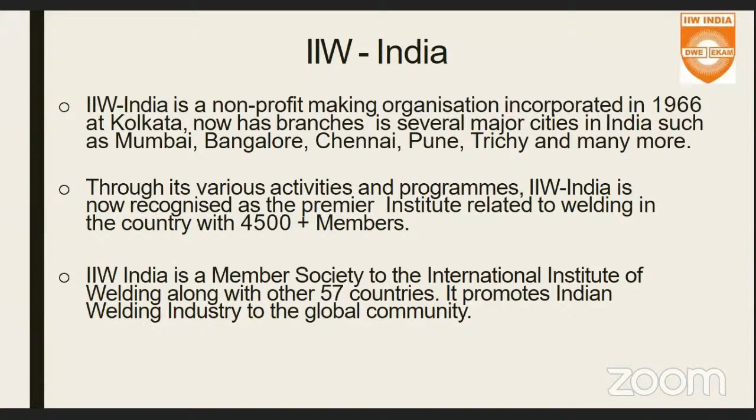We are now talking of the major objectives of the Indian Institute of Welding. It assists human resource development in welding in India. It works for technology diffusion in the industry.

There is some technical glitch. Yeah, now it is okay.

So IIW India also fosters R&D in welding in India. It also promotes health and safety related aspects in welding. It also has a major objective to establish international standards of quality for the Indian fabrication industry.

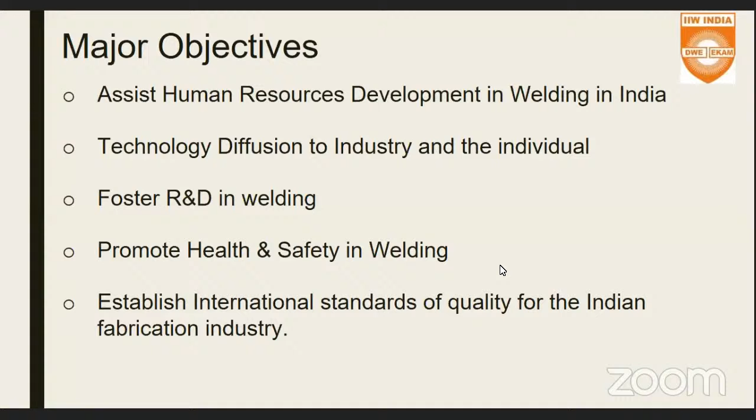What are the different activities that add value to welding professionals? IIW India conducts technical meetings, workshops, and industry-oriented training programs at the national as well as at the branch level. We also organize seminars, conferences, and exhibitions on welding and allied technologies. We have the Indian Welding Journal wherein a lot of technical articles get published quarterly in collaboration with AWS, that is American Welding Society, and a monthly newsletter is also being run, where you can see a lot of details on the website www.iiwindia.com.

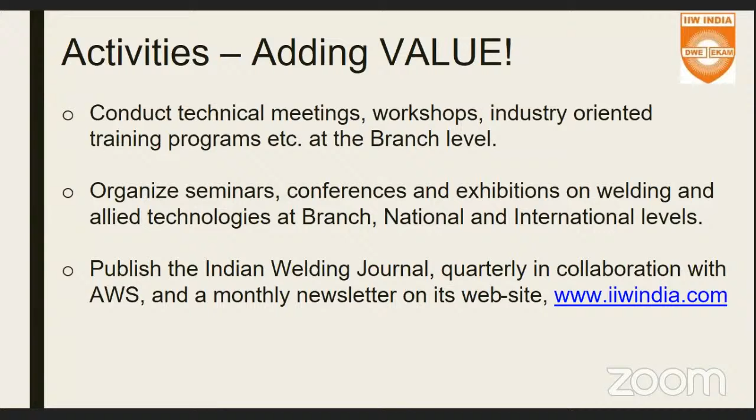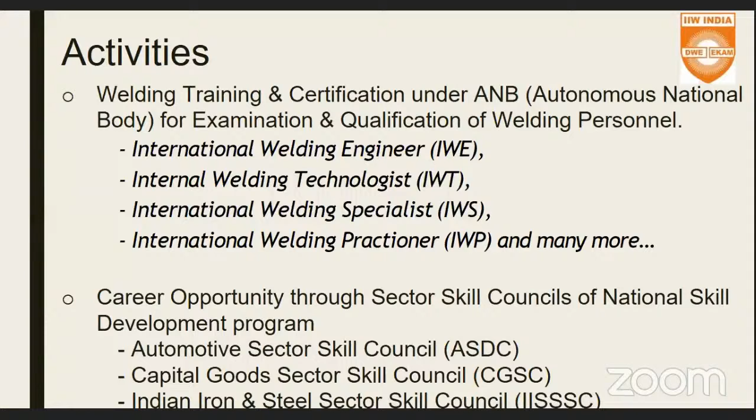Further activities, we also run welding training and certification like International Welding Engineer, International Welding Technologist, International Welding Specialist, and many more. We are catering to career opportunities by means of skill councils, with skill development programs like the Automotive Sector Skill Council, Capital Goods Sector Skill Council, Indian Iron and Steel Sector Skill Council, different skill councils that we are working with hand in hand for the skill development, particularly of welders. So these are a few more major activities.

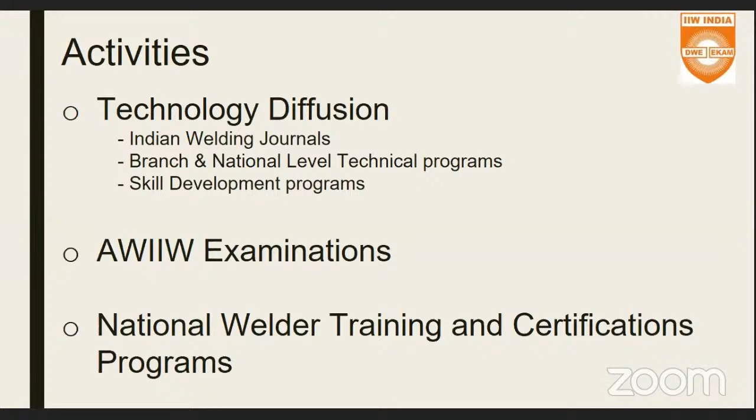When it comes to technology diffusion, as I've already mentioned, Indian Welding Journals, branch and national level technical programs, skill development programs, conducting AWIIW examinations, also conducting national level welder training and certification programs. We also help manufacturers with ISO 3834 audit requirements and conducting it. We also run train the trainers programs. Welder competitions, both male and female, we run, and many more other activities are being run by IIW India.

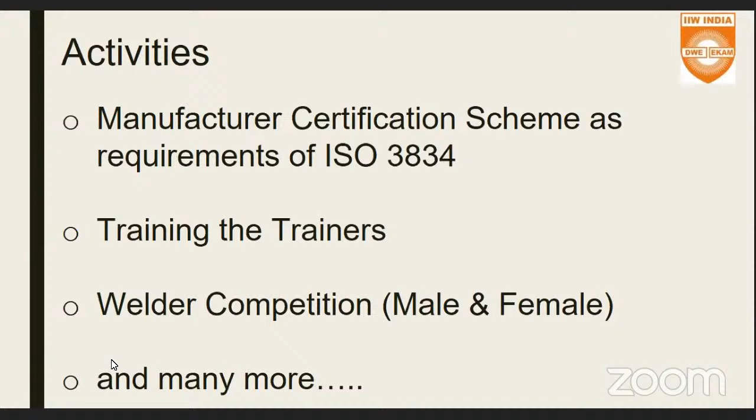These are the few benefits of being a member of IIW India. You can take advantage of several courses and examinations, and that will help you develop your personal career in welding, acquire and disseminate knowledge in welding, and do useful networking with fellow national and international experts, like what we are having today, an international expert speaker. So you are able to learn from them today by means of a webinar. Free access to the quarterly published Indian Welding Journal, concessional charges to members for the workshops or seminars, and many more benefits.

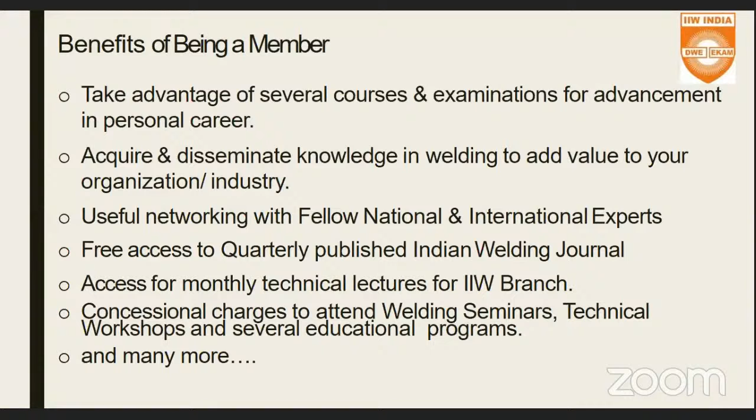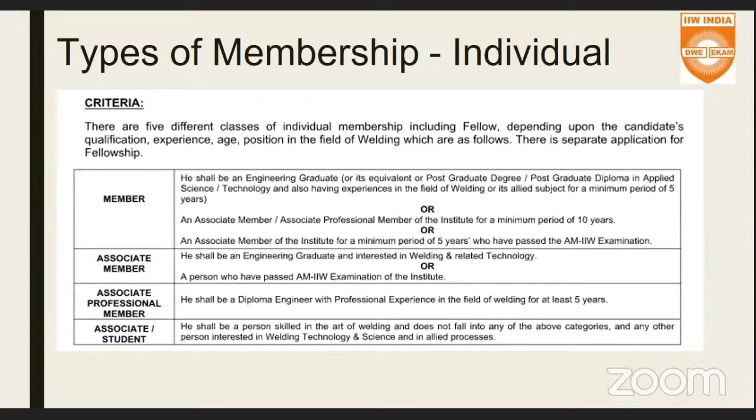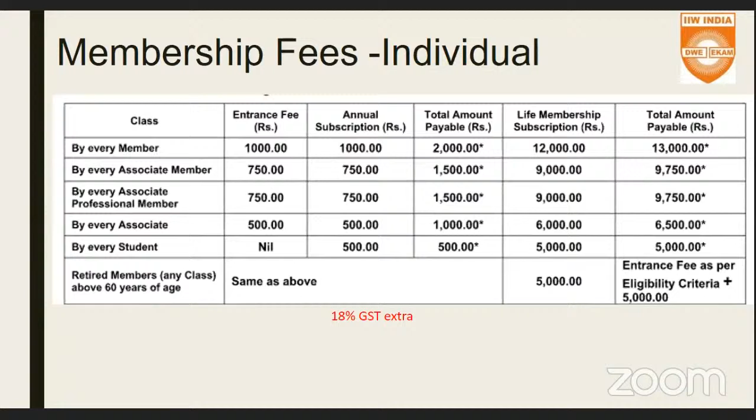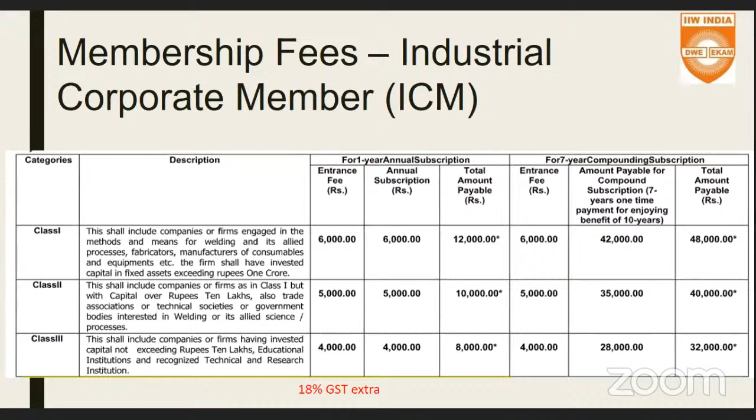If you as an organization would like to become a part of IIW, you can take the option of ICM, that is Industrial Corporate Member. These are the details on the slide you can see. And with that, I come to the end of this brief of IIW India and its activities.

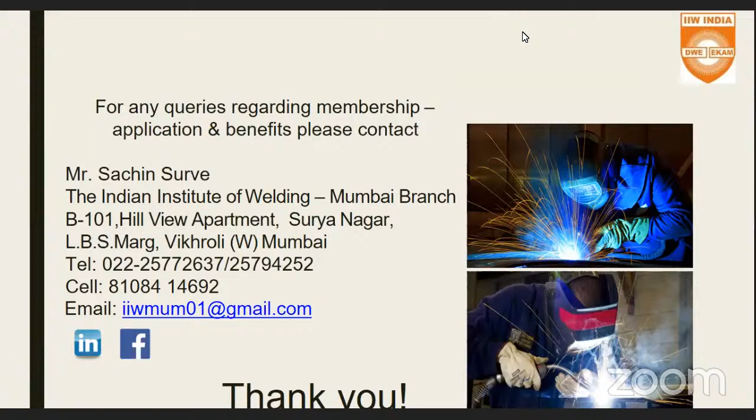Yeah, good morning, Chris Wiseman and Mr. James Redman. Good morning. Yeah, good morning. Morning. Yeah, a warm welcome from our side, from Indian Institute of Welding Mumbai branch for this tech talk.

Let me start a brief introduction regarding Chris Wiseman. Mr. Chris is a material scientist and has spent almost 30 years in an R&D career with a global aluminum producer. The technology areas to which he has contributed include corrosion, thermomechanical forming, novel test methods, plant process optimization, and joining and surface treatment, etc.

And Chris joined TWI in 2007 and is the corporate membership manager for both the aerospace and equipment, consumable and material sectors. He has an additional geographic responsibility for TWI industrial members in India and in supporting TWI's ambitions right down here. So most of you might have seen him at various conferences and seminars and exhibitions in India. He is a very frequent visitor. Today, his role is focused on developing technical and commercial opportunities for TWI and its customers all around the globe.

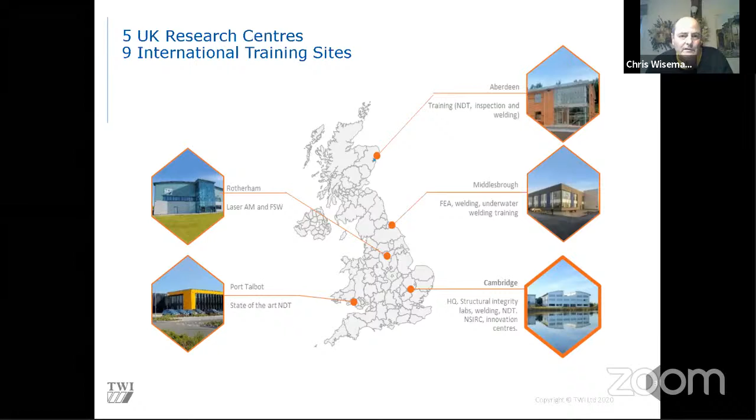This area down in Port Talbot in Wales is very specialized in NDT and in things like how do we apply NDT to Industry 4.0. So a lot of work going on there in, for example, continuous NDT. Next slide, please, James. And because most of our members are outside the UK, we have facilities, offices, and particularly training schools around the world. And in India, our main office and training school, as many of you may know, is in Chennai.

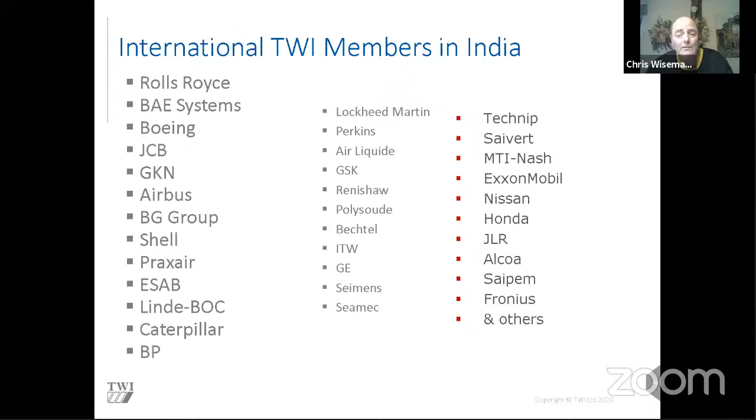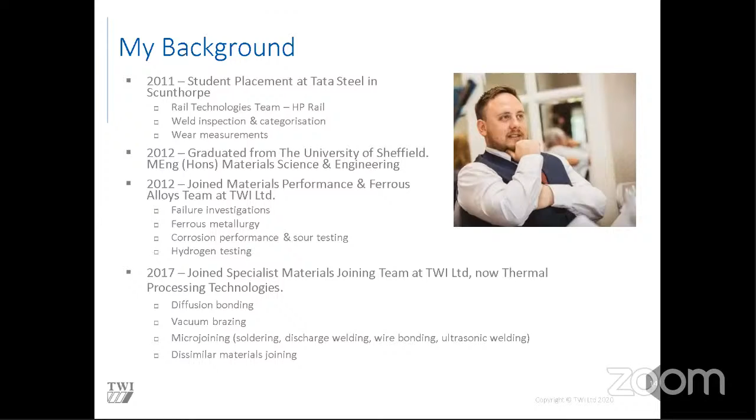I also do some other sort of more unusual things in the background. I do a lot of work with micro joining, so sort of electronics type joining projects, looking at soldering, discharge welding, wire bonding, and ultrasonic. And we also do a lot of work developing dissimilar materials joining, quite often with a heavy bent towards ceramic materials, trying to join ceramics to metals, for example. This is a brief overview of the thermal processing technologies team and the equipment and processes we cover.

So there's diffusion bonding, which I'll talk about more today. We do a lot of work with brazing, and probably 90% of our brazing work is vacuum brazing. And you can see on the top right hand side, I'll probably get the laser pointer, I can get that to work. There we go. So this is our large industrial scale vacuum brazing furnace, which is roughly about 1 meter cubed working zone. And we also have two smaller scale vacuum brazing furnaces, sort of laboratory scale.

We do infrequent work with flame brazing. We do have a brazing hearth and gas sources to do that. And we often get involved with induction brazing as well. Micro joining I've kind of already covered. The bottom right image over here is a wire bonding machine we have.

But we also do work with powders and coatings. We have a subsection of the team. There are 3 people working on powder categorisation. And by that, I mean looking at the shape distribution and size distribution of particles before they are 3D printed. And we also set up a nickel plating facility recently. We're doing lots of research into alternative and more novel type nickel plating processes. And finally, I've already covered ceramics. We cover our ceramic technologies at TWI. So joining questions, any sort of consultancy, be it failure investigations or processing questions.

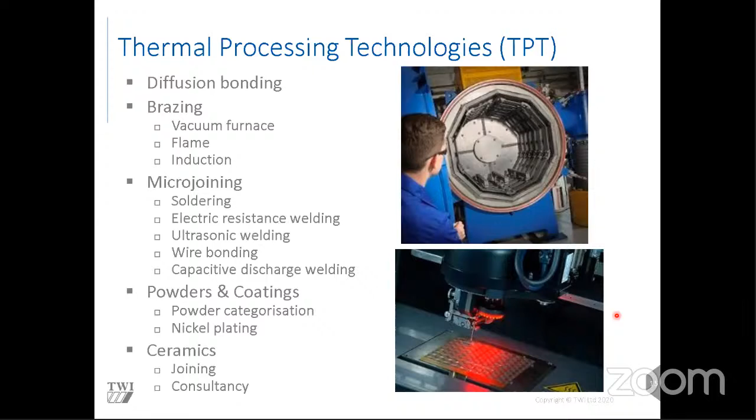So that's a brief introduction there, but now I'm going to go into what we actually all came here today for, which is to talk about diffusion bonding. So diffusion bonding is a joining process, and traditionally it's been used for more sort of niche applications.

And by that, I mean components which either have a complex geometry or where you're trying to join two materials which are difficult to join using more traditional methods. For example, when you weld certain materials together which are not compatible, you can form intermetallic particles which make the joint very brittle. So when you've got these issues, diffusion bonding could become a joining technology which is applicable.

But to put into basic layman's terms what diffusion bonding actually is, you take two pieces of material, typically with a machined face, you squash them together under load and under heat, and they become a solid block of material. Because we're heating these parts up, we typically do this in a protective atmosphere. So that could be a lack of atmosphere or a vacuum, or we could use an inert gas such as nitrogen or argon. And there also is some research being carried out looking at active gases. So a partial pressure of hydrogen could also yield some advantages.

But on the right-hand side, you can see a pictorial representation of what happens during diffusion bonding. So when you've got a surface, even if it looks really polished and flat, when you look at it closer up, it will have a rough surface. And these look a little bit like a mountain range, and these are called asperities. So the first thing that happens when you're applying the load and the heat is these asperities or micro asperities begin to deform. Then you start to get plastic deformation processes take over, creep type processes.

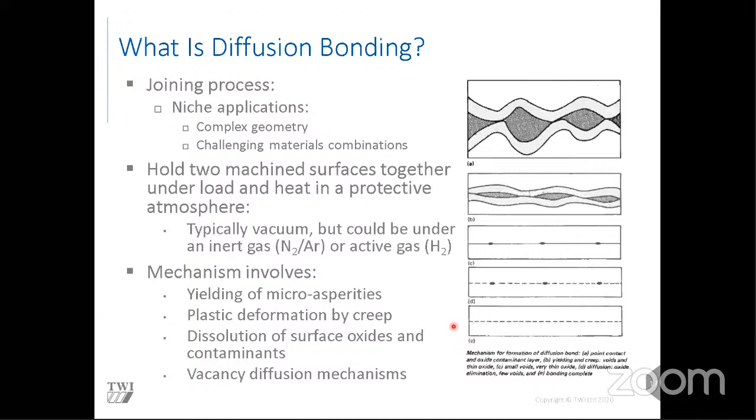Most materials will have an oxide layer on the outside, and at the temperature of diffusion bonding, these will then begin to diffuse into the parent material. Finally, at the end, once you have dissolved the surface oxides, the vacancy diffusion mechanisms begin to take over, and the small pores we've got get smaller and smaller until, if you've got the parameters correct, the diffusion bonded joint is almost impossible to resolve. So I'll give an example on the next slide.

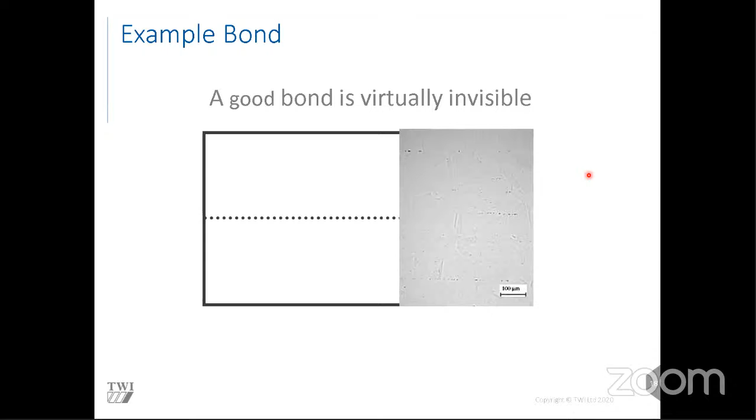So these were two different plates of material, and this is where the bond is. And as you can see in this micrograph, the bond is very difficult to resolve. You can just about make out a few tiny micro voids just here. So what I would also add, this property of diffusion bonding is what gives it such a wide range of potential applications, which I will discuss in later slides.

So just looking at the question there. Yeah, so this is a unique facility in the UK. I call this a medium scale diffusion bonding furnace. And by that, I mean, it's not an industrial sized piece of kit, but it's not laboratory sized either, which means we can get some pretty large parts into the furnace. The working zone is 300 millimeters by 360 by 400. We can go up to 1,600 degrees Celsius, and the hydraulic ram going through the center can apply up to 35 kilonewtons of load. This furnace 99% of the time is operated in a vacuum,

but we can put a backfill of an inert gas in there if we need to. There are certain situations, which I will discuss, where a partial pressure is beneficial. It's to do with something called vapor pressure of certain alloys. Certain materials will vaporize at high vacuum. So the hot zone is graphite lined, and we can actually modify the chamber for larger parts if we need to. I see there's a few questions. Let's quickly have a look at those.

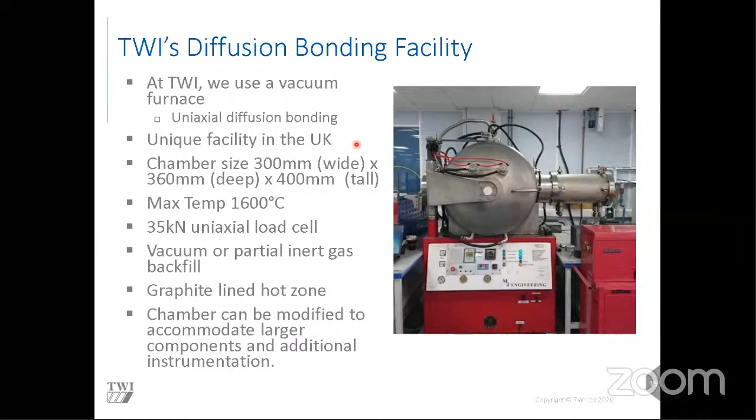So I think at this stage, I've given a bit of background on diffusion bonding, but I think it's a good idea to give an application at this point so you can visualize what you can actually do with this process. One of the things we mostly work on is the manufacture of heat exchangers, or I should say compact heat exchangers. On the top left here, we have what are called shims, and these have a pattern etched into the surface, often with a photochemical process. So it's called photochemically etched.

We stack these together, and when you diffusion bond it, you get a complex 3D structure, as you can see in the bottom left. These compact heat exchangers have advantages over traditional tube-to-tube sheet heat exchangers because the channels are closer. If you look on the bottom right here, this is a micrograph of this heat exchanger, and you can see how close the channels are. So this layer here will be the hot fluid, the layer below will be cold fluid, and vice versa. So you can see the small distance the heat has to transfer before it goes into the cold fluid. Because the channels are closer, they're more efficient, but because of the diffusion bonded joints, which I previously showed, which are almost invisible, the strength you can get from them can approach parent material. So you can actually run these at higher pressure as well to increase your efficiency.

Because of the way we can use diffusion bonding and these shims, I like to think this is an additive process, because you're adding several building blocks together to create a final part. And you can express yourself quite a lot in the design of these shims. So I think of it as an additive process. Not a traditional additive process, but a quasi additive process.

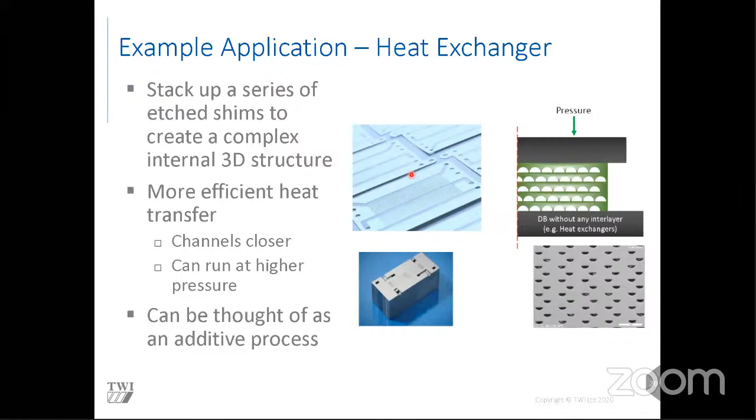With the process development trials, we start off with simple geometries, and we develop our parameters. Then we go to larger heat exchangers. So we go from smaller to larger, because with the smaller samples, you're trying to develop your parameters and work out the strength of your bonds. We typically investigate our bonds by mechanical testing, metallography and microscopy, and even corrosion testing. And then we finally scale this up to prototype full-size units.

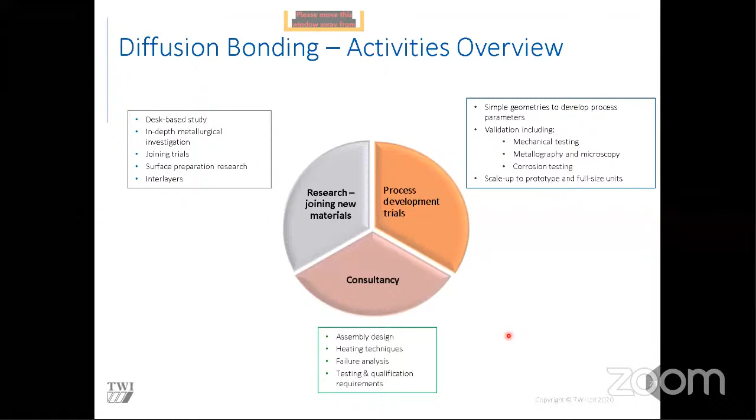Right, and the final thing we work on is consultancy. So we do general help with our clients designing assemblies. We look at different ways of heating the parts. That's quite important. And we also carry out failure analysis and testing and qualification programs for our customers.

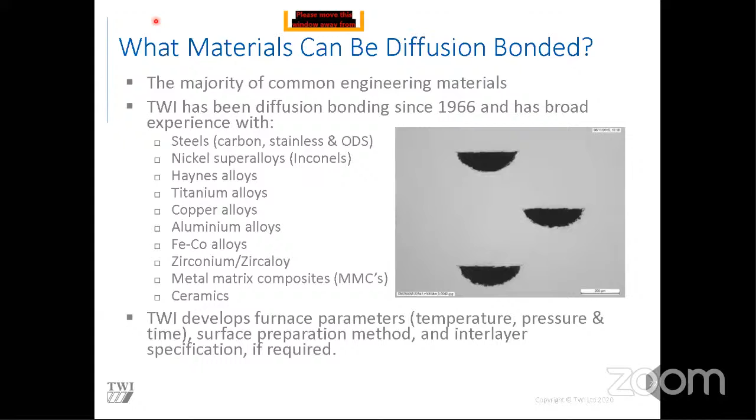So what materials can be diffusion bonded? Well, luckily for us, most common engineering materials can be diffusion bonded. And at TWI, we have looked at most materials. We've actually been diffusion bonding since 1966. We've looked at all different types of ferrous alloys, so carbon steels, stainless steels, ODS, nickel alloys, such as Inconels, the more exotic nickel-based and cobalt-based alloys, such as Haynes alloys, titanium alloys, copper alloys, aluminium, and also zircaloy and zirconium. And we've also investigated ceramic materials and metal matrix composites. What we generally do is develop the furnace parameters and the surface preparation requirements, which I'll go into more in the next slide.

And the reason for that is the limitation of our furnace. As I've already explained, we have a 35 kilonewton maximum load, so that often limits the pressure we can apply, especially if we have a large surface area component. But if you work in a laboratory, quite often you'll be working on smaller coupons, which allows you to apply a much higher load and increase the heating rates and the cooling times. But we tend to go for the lower load, longer hold time approach.

And to give you just a bit of a feel for some of the parameters, the temperature at which we bond is typically 60 to 80% of the melting point of the material. And by melting point, I mean the solidus. So some materials have a range of melting points. We'd go for the lowest one, so the solidus. The applied load is typically 1 to 10 megapascals.

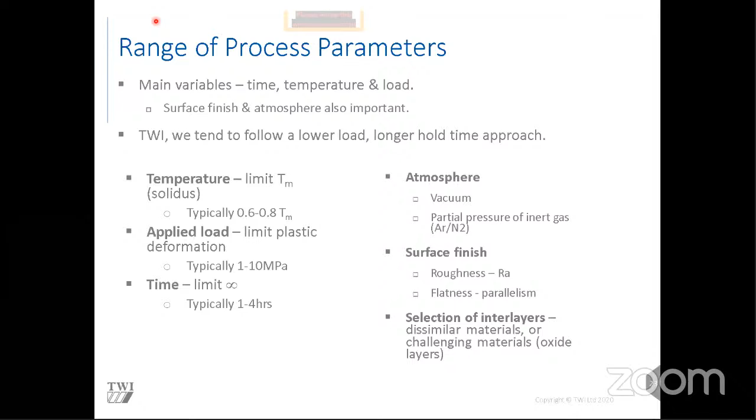So talking of oxide layers and interlayers, I'm going to spend one slide talking about a process called transient liquid phase diffusion bonding, or TLPDB. So this is slightly different to solid state diffusion bonding because we put in a thin interlayer of material between the two parts we're trying to join, and this will form a molten phase at a lower temperature than the parent materials. So essentially we're trying to melt the interlayer but not the parent material.

So it's kind of like brazing in a way, but you're applying a pressure and a load to the part, and you can get away with much thinner interlayers. What you can also do with certain material groups which are compatible, you can form a eutectic phase between the parent materials, and you can try to utilize this to get a small molten zone between the two materials. Off the top of my head, something like gold and tin forms a eutectic, or copper and aluminium. But anyway,

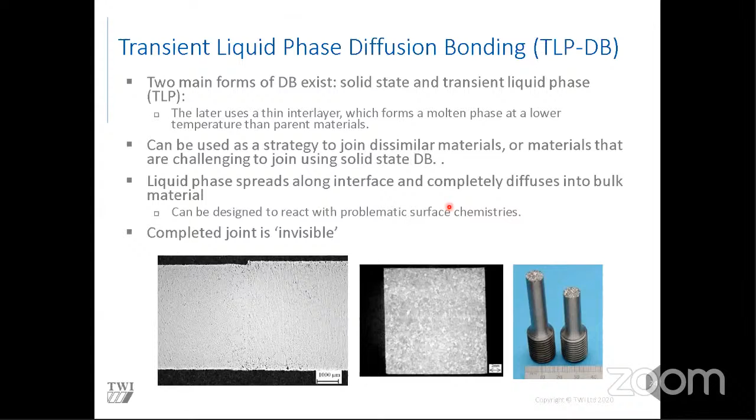Just quickly checking the questions that are coming in. So someone's asked, is friction stir welding a type of diffusion bonding process? I'd say no, it's not, because friction relies on a high yield, high strain approach, whereas diffusion bonding has no mechanical load of that sort, it's just a uniaxial load. And the reason for the load, it doesn't necessarily do anything, it's just to get the two interfaces into intimate contact. That's the whole reason for the load. The closer the materials are and the more you have in contact, the better the bond. So that's what the load does essentially. So they are different processes.

So yeah, because diffusion bonding is carried out at high temperatures, it can have an impact on the base material you're trying to join, and it also can have an impact on the design of your components. So we do a lot of work with our diffusion bonding development programs on verification and categorization, and these often feed back into the design process of the parts, and also provide us with confidence in the process, and allow us to determine if any post-processing is required.

For example, certain materials, once you heat them, become very soft, they become annealed. So you might want to do a post-diffusion bonding heat treatment. So some sort of heat followed by a quench, followed by an aging perhaps, for example.

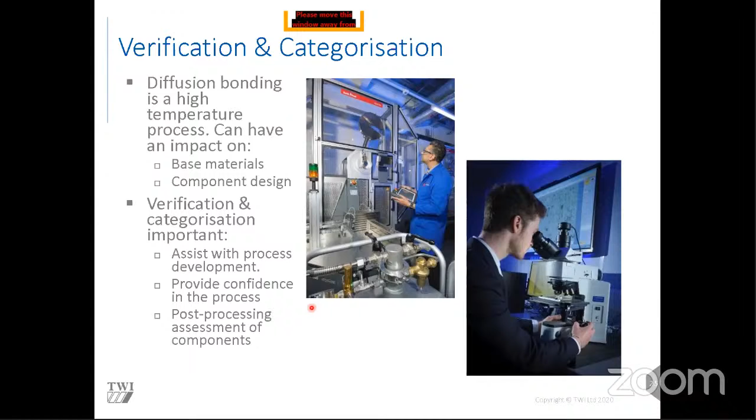So yeah, some of the verification techniques we use, the most basic yet the most powerful is sectioning and microscopy. From this, we can see the actual joints themselves. We can assess the level of porosity if there is any. We can see if there are any phases which are formed and analyze them using scanning electron microscopy, or the EDX function more specifically. But yeah, from metallography and microscopy, we can get an awful lot of information about our joints.

But the problem with that is it's not a mechanical test. So we do a load of different mechanical testing, ranging from tensile through to fatigue. If you look at Charpy impact, what I would say is we don't often do that on the bond itself, because trying to target the bond is almost impossible. But I'm talking more about Charpy testing of the parent material.

We also can do leak testing if the component geometry allows it. We can do a helium leak test to see if it's leak tight, and also pressure testing to see if it can withstand the service conditions. Finally, NDT is also an option, so ultrasonic inspection. But if you have a complex internal 3D structure, NDT can be very challenging.

So just looking at some more questions. Will diffusion bonding be useful to join single crystal alloys to polycrystal alloys without affecting single crystal properties? Yeah, it's something I'm wanting to look into. I'm not looking at single crystals as such. I'm looking at columnar crystals. But yeah,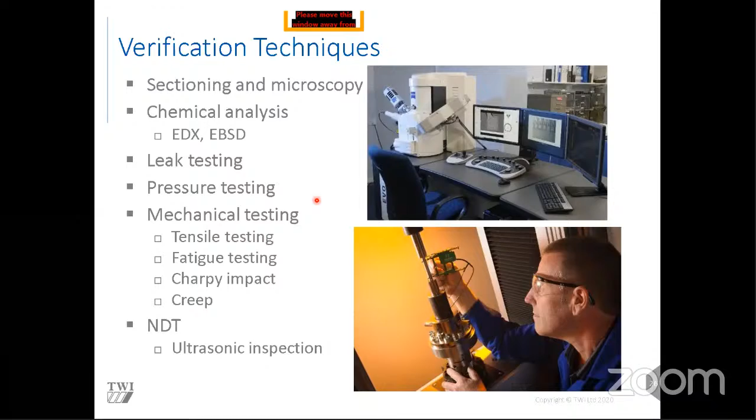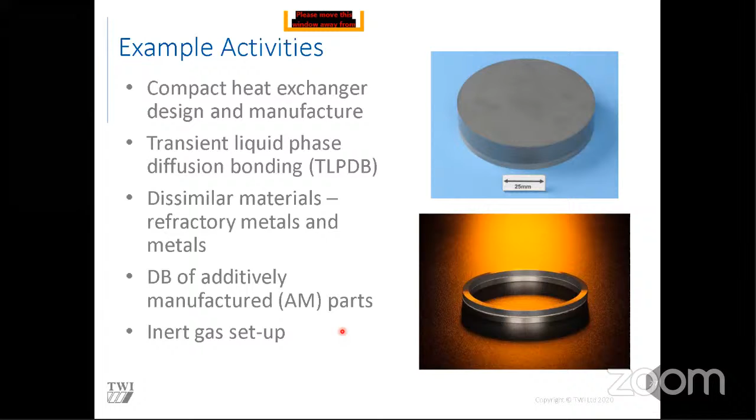Right, so that's sort of a brief introduction of diffusion bonding. I'm going to now go into more details of a particular type of diffusion bonding. This is for the diffusion bonding of aluminium alloys. So firstly, diffusion bonding of aluminium is challenging, but diffusion bonding for other materials is well established.

The reason it's difficult for aluminium is because of the oxide layer, but you're probably asking yourself, don't other materials also have oxide layers? And that is correct, but there's a difference here. Because aluminium alloys have a low melting point, you cannot heat the material to a high enough temperature to dissolve the oxide. In doing so, you would melt the aluminium, which is useless. So that's the problem we're trying to overcome. But there are more issues with that.

So because the actual temperatures for diffusion bonding aluminium, say, versus titanium, they're lower. So titanium diffusion bonds somewhere between 800 to 1,000 degrees Celsius, depends on the grade. Aluminium, you're about half that, well, sort of between 500 to 600, depending on your grade. So diffusion bonding is a diffusional process, and the biggest driver for diffusion is temperature. So if you're bonding at a lower temperature, you're getting less diffusion. So that's an issue. So then to promote diffusion between the parts, we actually increase the temperature to much closer to the melting point. So you're probably talking at 90% of the melting point rather than 60 to 80.

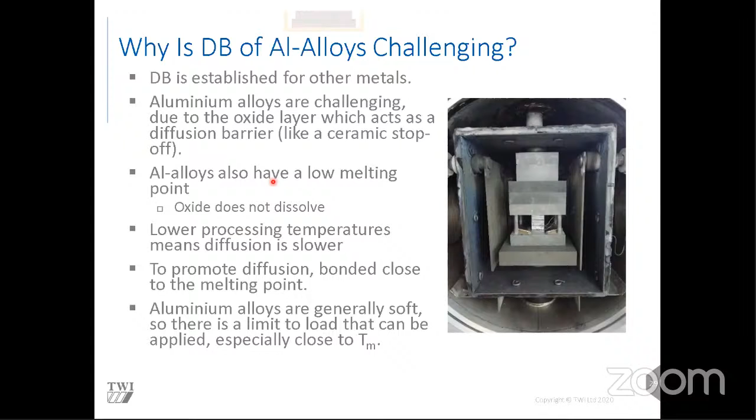So it all depends on your material, but ultimately we carry out small scale trials. So it's like an iterative process. You'll probably need between 5 and 10 samples to try to narrow down your processing parameters before you go to sort of larger scale. Right, so if diffusion bonding of aluminium is so difficult, why do we actually want to do it? So the reason is that there's a few distinct advantages that diffusion bonding of aluminium alloys have.

And the first one is it's an autogenous joining process. So that means there's no additional materials unless you have an interlayer, like I said. But if you don't have an interlayer, it leads to increased corrosion resistance. But also, aluminium alloys have a high strength to weight ratio. So that means you can have lighter structures. And that's very big news at the moment in Europe in particular, because we have some very strict emissions targets to hit by 2030. So anything which can help to lightweight your structures is considered very seriously.

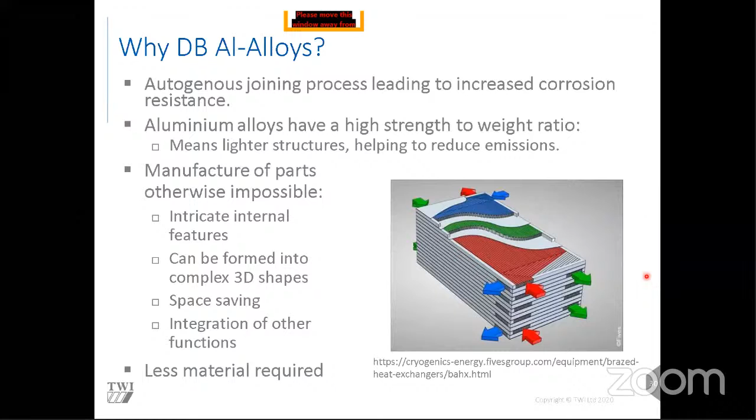But I think the main reason is diffusion bonding of aluminium enables you to manufacture parts which would otherwise be impossible. So you can have intricate internal features, you can form structures with complex internal 3D shape, you can create things which are more compact, so you're saving space, but you can also integrate other functions into your heat exchanger. And the other thing is, because you're making more compact parts, you're using less material. So there's quite a few benefits to aluminium diffusion bonding.

So is it actually possible? And the good news is, yes, it is. And there are 3 general approaches which I will briefly discuss. So the first one is to apply a large load, induce large deformation into the sample. This will disrupt the oxide layer and allow diffusion between the different layers. The issue with this is, if you have intricate features, such as in this image here, you have these tiny channels, if you apply a load which is too high, they will deform and turn into very thin crescent shapes, and they'll lose their functionality. So there's a limit to how far you can take this.

The second thing would be to use interlayers to form your low melting point phase. So typical materials which are compatible with aluminium include copper, zinc, and silver, but each of these have their own issues. So copper, you can form brittle intermetallic phases. Zinc is not vacuum compatible. What I mean by that is all materials have a property called a vapor pressure limit. So that means at a certain temperature, in a high vacuum, the material will just evaporate from the surface. It will become a gas. And zinc does that at very low temperatures and very low vacuums. So zinc is not compatible in a vacuum furnace unless you use a partial pressure of inert gas.

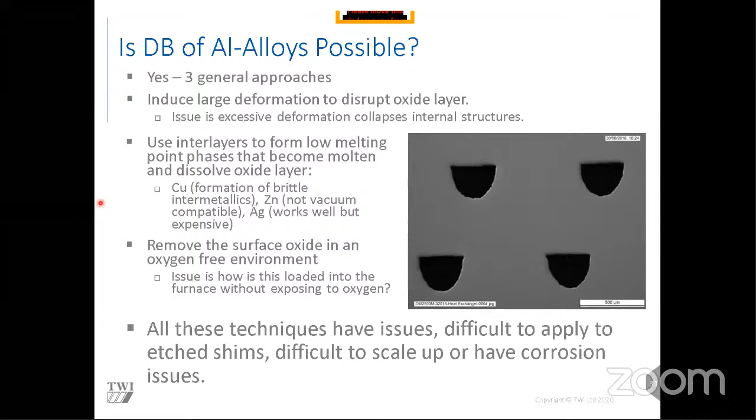So this is where TWI has developed some proprietary technology. We've actually developed a diffusion bonding technique where we can bond aluminium without the use of any interlayers and using a low applied pressure. We're actually creating a completely autogenous joint.

So we've got a couple of examples here. This is a block of shims that we've diffusion bonded together. And when you cut that in half and look at the section, you can see here the material is completely consolidated into one solid lump, and you can't see any of the bond lines.

We've done a lot of work for one of our clients in a single client project, so I can't talk too much about this, but what I can say is we have scaled this process up to full-scale heat exchangers. And in the images here, I should add, we're looking at 6082 grade, so 6000 series. At the bottom here, I can't discuss the precise process we use because this is TWI's intellectual property. But what I can talk about is we have an ongoing exploratory project where we're investigating 6082 and 2024 alloys.

I see there's a few more questions. I'll have a quick look at these.

Have you tried joining titanium and nickel alloys using DB? I haven't specifically. Titanium alloys are very easy to diffusion bond. They're one of the nicest materials. The biggest issue with them is they're very susceptible to any oxygen contamination, so you have to be very careful.

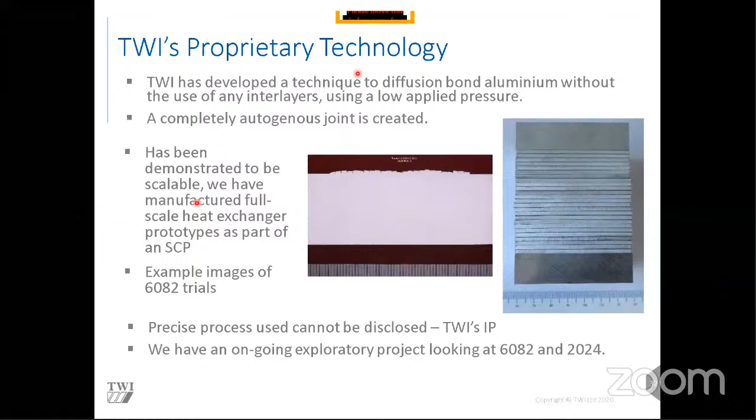Compared to other solid state welding processes, how much is the joint strength as far as the similar material? So for a lot of the diffusion bonded joints, the diffusion bonded joint can be the weakest part, but it's not always the case. Like the example I showed earlier, actually failed in the parent material. We like to get to around 90% of parent material strength or higher. So whilst they might be slightly lower strength, if you've done the process properly and removed all your voids, they're as good as the parent material. So they shouldn't create any sort of failure concerns specifically.

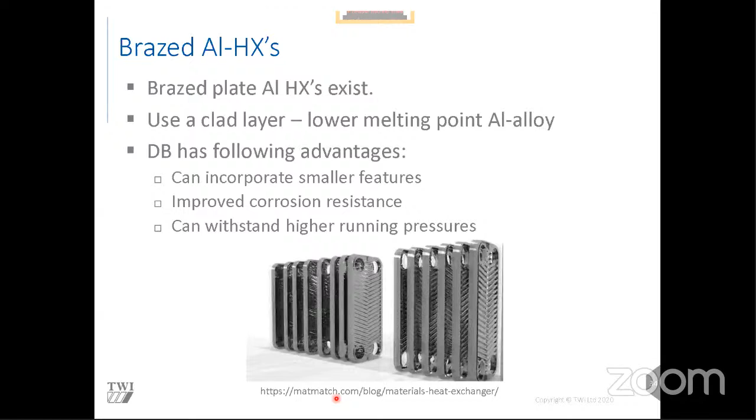Also, if we're doing a solid state diffusion bonded joint, we have improved corrosion resistance. And as I said earlier, you can get basically close to parent strength properties, so you can actually run the heat exchangers at higher pressure, meaning they're more efficient. Well, have a look at the questions again quickly.

Is the similar joint of Ti-Ni, so titanium to nickel, feasible through diffusion bonding? I'd have to have a look at that one. It's not one I've looked at. I'd have to look at the literature. I've not come across a combination of materials where it's not possible, though, with some clever thinking and some clever application of suitable interlayers. So I'd have to look into that one specifically.

What kind of surface preparation and finish is required for diffusion bonding? Very good question. So that ultimately is, again, as with most of these answers, dependent on the materials and the grades and the process you're using. If you're using a transient liquid phase process, you can get away with slightly rougher, slightly less parallel surfaces because you have the molten phase. But typically speaking, if you're doing a solid state generic diffusion bond, you want your surface roughness to be sub-micron. So I like to go for 0.4 micron Ra or better.

And with the flatness, again, you want it very, very flat. If you're aware of optical flat measurements, there's something called light bands, and we like to go for better than 4 or 5 light bands of flatness, generally speaking. So we're looking at very smooth, flat surfaces to give us the best chance of a good bond. But like I said, some materials are more ductile than others, so you can get away with a worse surface finish for certain materials.

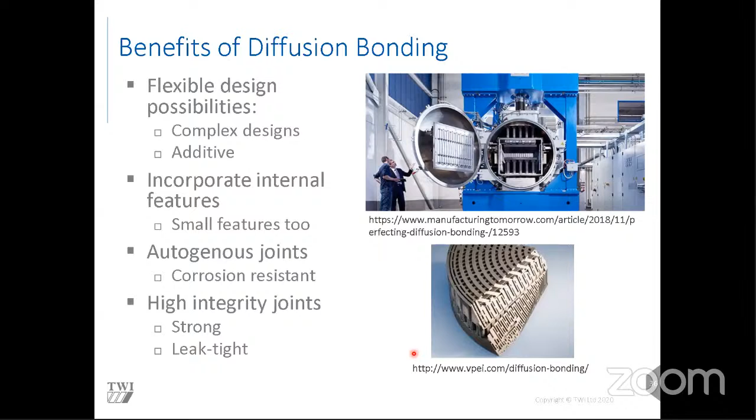Right, I'm now going to discuss some generic applications for diffusion bonding. So again, I just want to reiterate what the benefits are before I go into the applications. So diffusion bonding allows flexible design possibilities, so we can have complex designs and it's an additive process. And we can incorporate small internal features. So look at the bottom right, this is a very complex heat exchanger, which wouldn't be very easy to make using other processes. And the picture on the top right here is a more industrial scale diffusion bonding furnace. So yeah, again, the other benefits are we've got an autogenous joint, so it's more corrosion resistant, and we can have high integrity, leak tight, strong joints formed by diffusion bonding.

So one big area that we do a lot of work in is the use of compact heat exchangers in the aerospace industry. The aerospace industry has the requirements for lighter heat exchangers. And the next generation of jet engines, such as the turbofan engines being developed, also the ultrafan engines being developed by Rolls-Royce, are going to be running hotter.

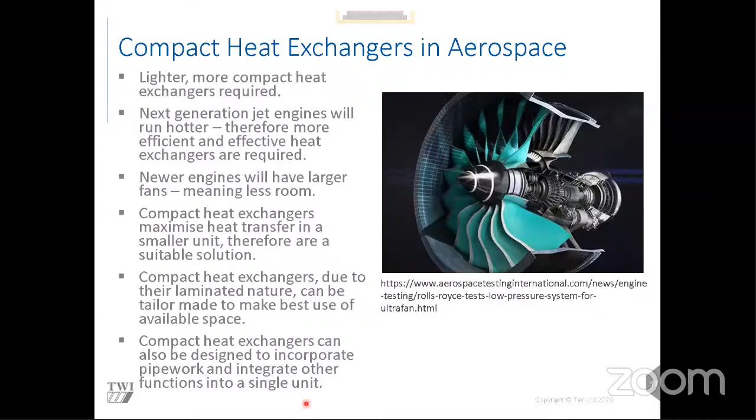The problem is a lot of the traditionally diffusion bonded alloys are relatively heavy, so development of aluminium is quite exciting for this application. But yeah, the compact heat exchangers, because of their laminated nature, can be tailor-made to make use of some quite unusual spaces and shapes and sizes of space inside the engine. They don't have to be rectangular; they can be any shape you like. The compact heat exchanger can actually incorporate pipe work and other functions into the actual unit itself. So it's a nice flexible technology which can be used in the aerospace industry.

A few more questions are coming, so I'm going to have a quick look at these.

Yeah, so I've got a question. How do we determine which interlayers to use for transient liquid phase diffusion bonding? Again, we start off by looking at papers and published articles, that'd be the first place to look, but then you also need to look at the phase diagrams of your materials as well. Just to try to work out if you're going to form any eutectic phases. But yeah, first thing really is literature, then it's small scale studies, and then examination.

Have you formed any brittle intermetallic phases? So we're looking at SEM, we're looking at hardness testing, all this sort of stuff. So you can have a best guess, but you ultimately have to test to determine.

Is diffusion bonding accepted by international codes and standards? This is something I'm not particularly familiar with. My manager does a lot of work in this area, and he is trying to push diffusion bonding more into these sort of design codes and actually standards. What I would say, diffusion bonding doesn't really have an actual standard anyway to manufacture parts, so I doubt it will be in ASME or DNV. So this is something being looked at by my manager at the moment.

Can reheating a diffusion bonding product lead to a disbond? Yes, it can. Certain materials, when you heat them and quench them, will deform quite a lot. So you do run the risk of debonding layers. Your material, the actual process you use, you can tailor it to induce less stress in your components. Big one is how you design your components in the first place. Try to remove corners and stress raisers. But the final one is to make sure you've got a decent diffusion bond. If there's no voids or nothing for a crack to initiate on, the chance of it ripping apart is lower. But it is a particular problem for aluminium alloys, that is. So that's a good question.

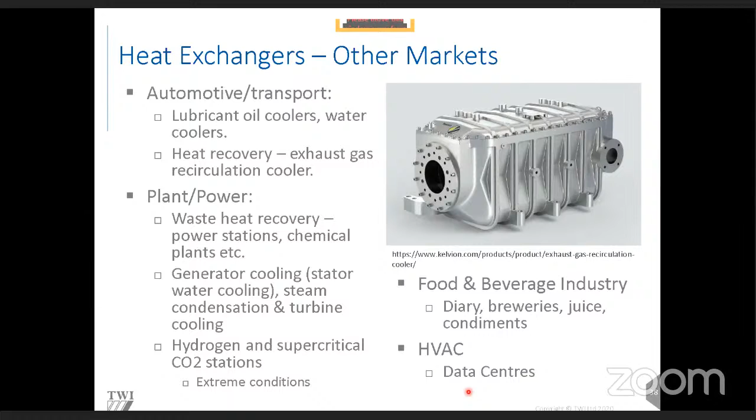And sort of more generic use could be the food and beverage industry. There's a lot of heating up and cooling down of fluids in these industries, so they need lots of heat exchangers. And the last one is, what's it called? Ventilation and air conditioning systems, such as data centers.

But common materials which are superplastically formed include titanium and titanium alloys, and also it is possible to do on aluminium alloys. One of the common things which links these materials together is a very fine-grained microstructure. So this is actually used quite a bit in the aerospace industry, and it's used to make hollow turbine blades, for example. But the way it works, you start off by diffusion bonding. So you have your different sheets, and you apply something called stop-off.

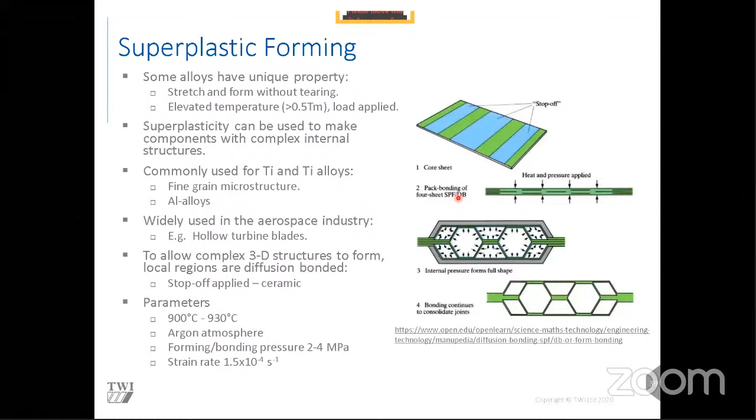So yeah, trying to think what else to say on this. It's quite often referred to as SPF DB, so superplastic forming diffusion bonding. So that's a sort of niche application of diffusion bonding to be aware of.

Got another one here. Let's see if I've got any more questions first. Will diffusion bonding withstand its working environment if it's at a lower temperature? I think what you're saying is, are diffusion bonds better at lower temperatures? I think the answer to that is yes. I think it all depends on the materials you've selected, which grade you're looking at, because it all depends on the joints and your actual environment.

So I'm going to go on to another very unique type, a sub branch of the diffusion bonding family, and that's something called electrostatic bonding. This has been used since the 1960s for joining silicon to glass. And this is very similar to other diffusion bonding processes because you require the surfaces to be very clean, very flat.

The components here, so this is our electrostatic diffusion bonding kit at TWI. These plates move together, and your part in the middle is what's diffusion bonded. Once these plates come together, a big shell comes down over the top, and that's your vacuum vessel. These are typically bonded at 3 MPa and about 400 degrees Celsius. Once you're at your top temperature, you apply a DC voltage of around 100 volts to the parts, with your metallic components being held positive. So you need the electric current for this to work.

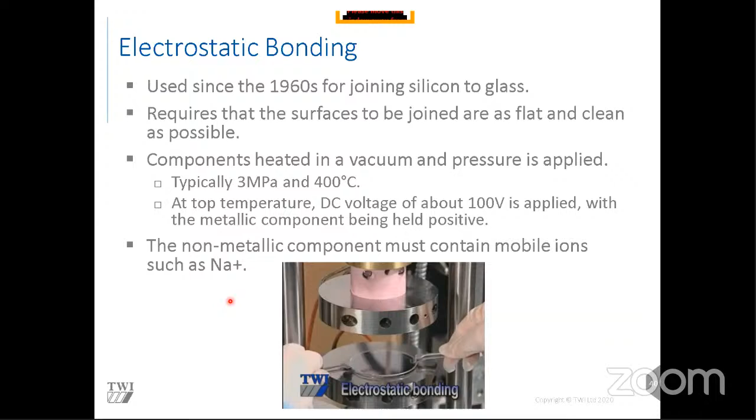The other thing you need for electrostatic bonding to work is mobile ions, such as sodium, in the glass. Other than that, I don't actually know too much about this. Our electrostatic bonding kit hasn't been used for around 6 years, so I've never looked at this myself, but it is another alternative diffusion bonding process I thought you would be interested in. But I couldn't answer too many questions on that, unfortunately.

So another sub-branch is hot isostatic pressing, known as hipping for short. The fundamentals of this are very similar to uniaxial diffusion bonding, where you're heating up materials and applying a load to them. But what is different is how you apply the load. Rather than a hydraulic ram, you're using a pressurized gas to apply your load, and that's commonly argon. This creates an isostatic load on your parts. That means it's getting squashed from every single direction rather than just one direction.

And the pressures that are used are typically really high. You can get up to 1,000 or 2,000 bar, which is why you see in the image, this is an example of a HIP furnace. You've got your furnace here, and you have a massive yoke around the outside just to keep the pressure inside the vessel. All of that is just strength and reinforcement. So you can get some ridiculously high pressures. You can use hipping to join solid parts together, but we quite often look at using hipping to consolidate and join together powdered material.

Common applications for hipping include hard facing. You can put a wear-resistant or corrosion-resistant material onto steel, for example. This is quite often used in the paper mill industry and the plastic extrusion industries. You can also use it to densify additively manufactured parts. You can take components you 3D printed using laser additive manufacture, for example, put them into your HIP, and it will then remove all porosity from your parts.

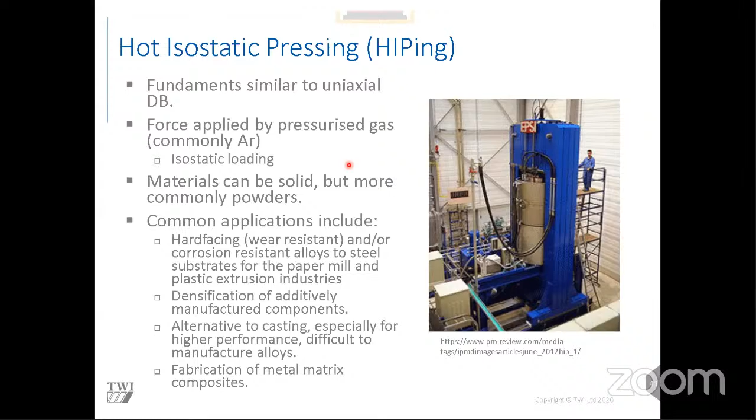So yeah, some other generic applications. One is a cryogenic heat exchanger. On the right-hand side is an example of a cryogenic heat exchanger. This is not diffusion bonded. This is a traditional tube type one. But imagine if you could make this complex structure into a compact heat exchanger. I think aluminium alloys will be very good for this because of the crystal structure of aluminium, they do not become brittle at lower temperatures, and actually, in some cases, become ever so slightly stronger.

So I see a really good opportunity to use aluminium alloy diffusion bonded heat exchangers where liquid hydrogen, nitrogen, helium, or oxygen is used. Could also be used for superconductor type applications or in the liquefied natural gas industry. So they're the two sectors I'm looking at. Other applications include process intensification, particularly for the petrochemical industry. What I mean by this is a lot of these petrochemical processes have a lot of waste heat and waste gases, so it's trying to use that and bring it back into the system to increase efficiency. Instead of just losing your heat, let's use it to do something else, to save money, make it more efficient, that kind of thing.

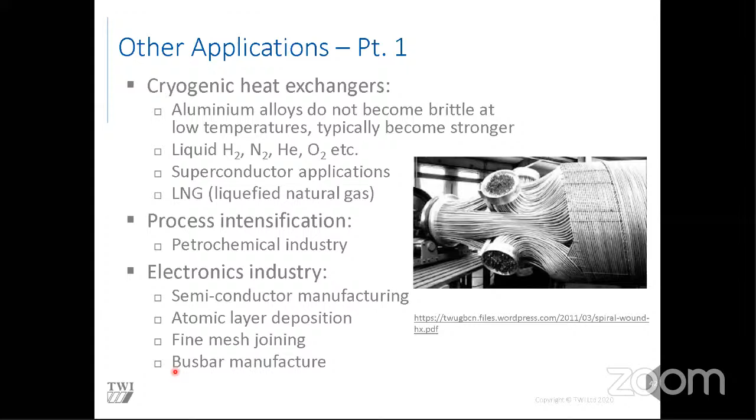Another area where we've done quite a few projects recently is the electronics industry. A lot of machines and equipment which are used to manufacture semiconductors make use of some very complex structures, kind of like shower heads, but much more complex, with lots of very small holes, and they can be vacuum brazed or diffusion bonded together. Same for machines which carry out atomic layer deposition. They need very precisely sized and shaped nozzles, so maybe diffusion bonding can be used for that. We've used it recently to join fine meshes together, and we've also looked at busbar manufacturing. The real driver there is trying to join dissimilar materials to create transition pieces, the busbars.

Other applications include microsystem technology. What I mean by this is there's a whole new area of 3D printing and additive manufacturing, but control and quantification and sizing of the particles is very important. And what you could do is use diffusion bonding to make fine channel filters for your powders. So you could say any particle over 0.5 microns cannot get through the sieve, so you filter out your larger particles.

So particle sieves and fine channel filters. Another area is injection molding dies. On the right-hand side, we've got two approaches. On the left is traditional. So you've got some pipes in your die. On the right-hand side, you've got your additively manufactured part, or your diffusion bonded part.

And as you can see between the two, the channels here are much closer to the surface of the die. This is called conformal cooling. It's trying to get your heat transfer as efficient as possible. And this is very, very big news in the injection molding industry because tool wear is an important consideration. As you can see, the tool here is much hotter compared to the conformally cooled version, but also the quality of the parts which are injection molded is much higher quality if you can get the tool to be colder. So you're increasing the life of your die, and you're improving the quality of your injection molded parts.

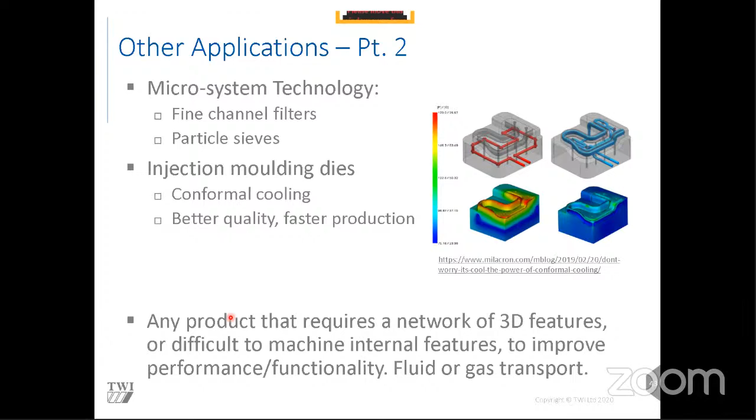And nowadays, I don't know if you guys have ever seen this, there's some very, very intricate stuff being injection molded. There's some very tiny, very fine features. They're really pushing the boundaries. Conformal cooling helps to enable this. But just to summarize, any product where you have a complex network of 3D features or difficult to machine internal features, where you're trying to improve performance or functionality, you can use diffusion bonding. Anywhere you've got a fluid or a gas you're trying to transport, you can use diffusion bonding. So I'll go back to the questions again.

So what is the difference between diffusion bonding and roll bonding? Roll bonding is very similar, because you're heating material and you're applying the load and you're rolling it. The main difference is the time. Diffusion bonding is generally speaking a process which has a longer hold time. And with roll bonding, you're trying to create things like braze alloys with an interlayer or sandwich structures you're going to use somewhere else. You're trying to create something thin. Diffusion bonding is looking more at 3D structures, but you could consider roll bonding as a subset of diffusion bonding. So that's certainly true.

Can diffusion bonding be used to join tubes to tube sheets in shell and tube heat exchangers? Uniaxial diffusion bonding, no, but there's no reason you couldn't look at using hipping. The issue is going to be what size is your shell and tube heat exchanger. If it doesn't fit inside the HIP furnace, then you've got no chance. But I think generally with diffusion bonding, we're trying to get away from tube to tube sheet heat exchangers. We're trying to replace those with compact heat exchangers. So that's kind of the drive of the technology.

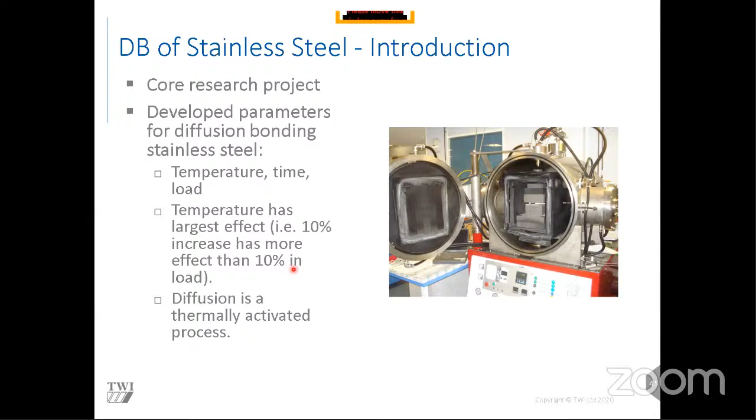What I mean by this is a 10% increase in temperature has a larger effect than a 10% increase in load or pressure. So temperature is very important. And here are some micrographs of what we managed to diffusion bond.

And you can actually see the size of the pores aren't too dissimilar from the size of the sort of intermetallics or pores in the parent material anyway. So it's very difficult to see.

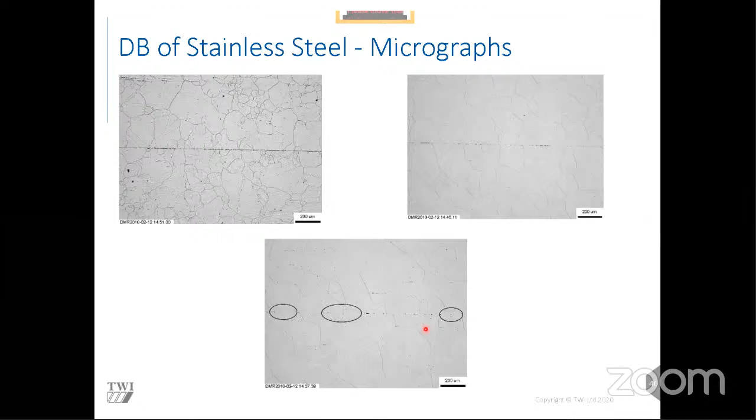Before I go on to the next bit, I'll look at a couple more questions. Can diffusion bonding be used to fuse porosity and or blowholes in products, for example castings? I've not seen uniaxial bonding used in this way, but if you consider hipping to be a diffusion bonding process, then yes, you can use hipping potentially to consolidate castings. Again, I've seen it mainly with 3D printed parts. I've not explored generically cast parts, and I don't get involved too much in the hipping powder side of things, but we do have experts in the team who could discuss that further if you're interested.

Can we diffusion bond between different metals? Yes, we can. So if we're lucky, we can diffusion bond different materials using no interlayers, so a solid bond. But the number of alloys where they're compatible is few and far between. There are a few though, but quite often you need to use an interlayer to create a transient liquid phase diffusion bond, or you could try to make use of a eutectic phase if it exists for those different materials. So it all depends on your combination of what approach we would take.

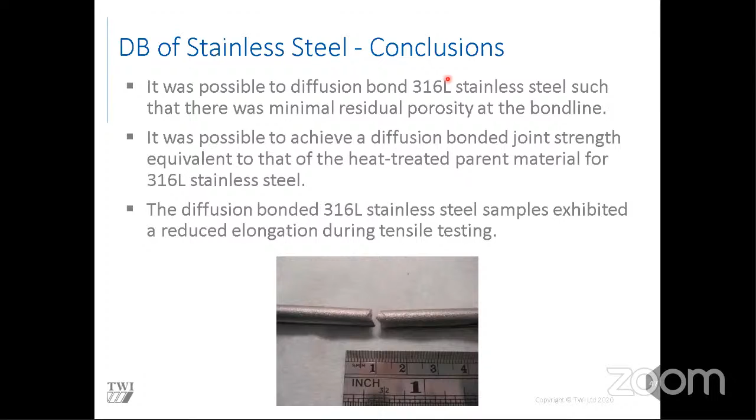Right, so I'm going to go through another case study now. This is a European collaborative project we carried out called Renew X. This is supposed to resemble an X, these two arrows. So yeah, brief overview. There are 200 million households in Europe. All of these have domestic heating needs, and it actually accounts for around 30% of the whole of Europe's energy demand. So we need to try and reduce this to achieve the emission reduction targets set for 2020. So we should add, this project was carried out around a decade ago. So that's why it's saying 2020 targets.

And the other thing as well, from a security point of view, Europe wants to try to decrease reliance on imported energy from places like Russia, for example. So one solution is to use more renewable energy. And we're looking at, instead of a conventional boiler type system for a house, something more efficient called a heat pump.

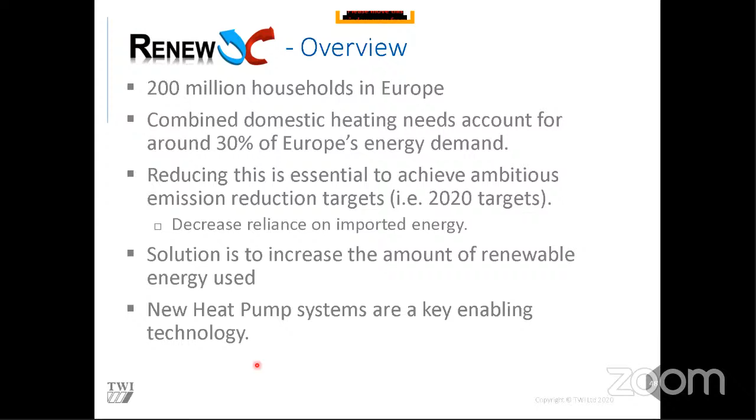And these are sort of new, well, as of a decade ago, newer systems to heat your home. So the challenges were several of these. Electrical heat pumps are expensive compared to your modern condensing boilers. The assumption was when this project began, there's going to be no subsidies for these units. So heat pumps, for them to be economically viable, have to significantly outperform a traditional boiler or a gas-based alternative, so a gas boiler. If it's more expensive, it's got to be better for people to buy it.

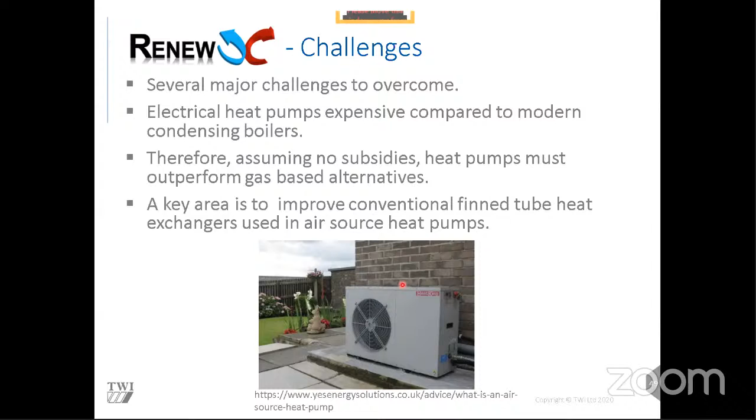Essentially, in the initial phase of the project, it soon became very apparent that a good way to replace the traditional heat exchangers is to use a compact heat exchanger. And the literature reviews and discussions amongst the consortium eventually decided on a 316 stainless steel heat exchanger. So this was really good for us because we carried out that research program, which we've already discussed. So we already had the data.

But basically, the way these parts work is you have your photochemically etched shims, which you stack together to create your complex geometry. And these can then operate at high pressure and are leak tight. So the advantages of these heat exchangers over the conventional finned tube heat exchangers are they're smaller, lighter, they're a single block of material, there's no potential for galvanic corrosion, and they are corrosion resistant because of that. So those are the advantages.

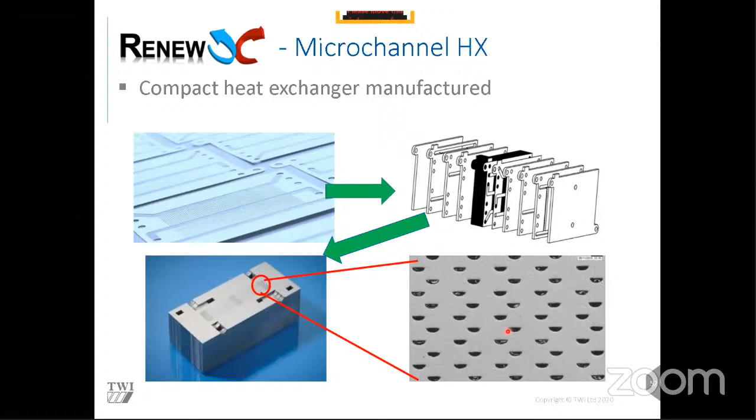The design of the shims themselves is important. In fact, I've not really discussed this yet. If I go back a slide, when we're applying the load, it has to go through each individual layer. And if you have any dead zones or dead regions, you will not get a bond. So if you've got a huge hole here, let's say, the layer underneath will not bond. So you need to really carefully design each layer to ensure that the load is transferred through the entire stack to ensure that every layer is diffusion bonded well. So that's very important. In fact, I reckon for heat exchangers, shim design is the most important thing, actually. You can play with the parameters, but the design is harder to change once you've made your parts.

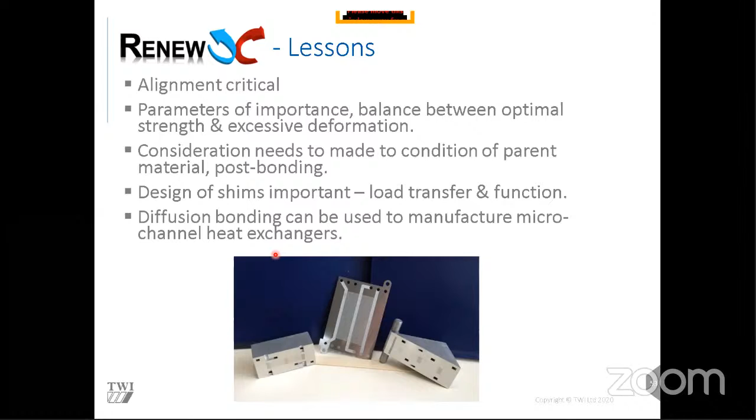So here is the key part. But also, the final lesson was diffusion bonding is a process which we can use to make micro-channel heat exchangers, which was a great outcome for the project. So I'll look at the questions before I go on to this example.

Is there a reliable process for bonding titanium to steel or aluminium to steel?

Again, aluminium to steel, I know, is difficult. You need to use quite clever arrangements of interlayers for that one, because you can get some quite brittle intermetallics. Titanium to steel, we've had that already, I believe, that question. For ship superstructures, a lot of these parts are going to be very, very large. So if they don't fit into a furnace, you're not going to be able to diffusion bond using these processes. But as someone alluded to earlier, there is hot rolling, so that could be a process which is applicable.

Can a diffusion bond product pass the hydrogen disbonding test? Yes, it can. We've actually done some trials. We have done tests and trials on heat exchangers in hydrogen, and they've passed. So yes, they can. I can't say much more than that, though, unfortunately.

In the 316 diffusion bonding experiments, where did the failure occur in testing, in the parent metal or the diffusion interface? I'll be honest, I don't know the answer to that question because I didn't carry out that program of work. I have done some work on 316 stainless, and it's variable. It depends on the parameters. So it can fail at the interface or it can fail in the parent material. It was a bit of a mixed bag. It depends on how good your bond is.

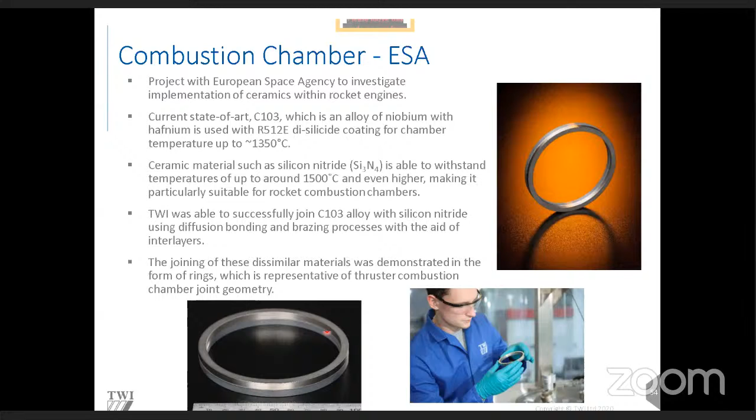But it is possible. Right, so back onto this example, combustion chamber. We carried out a project for the European Space Agency, or ESA, and the idea is to look at using ceramics in rocket engines. At the moment, they use C103, which is a niobium alloy with hafnium, and it has a special coating on the surface, so it can operate at temperatures up to 1,350 degrees Celsius.

But there's an interesting ceramic material. Well, there's quite a few interesting ceramic materials. One of them of particular interest is silicon nitride, but this can go up to even higher temperatures of 1,500 degrees Celsius. So that would make it even more attractive for rocket combustion chambers. So the question is, can you join C103 to silicon nitride?

So the answer is yes, we can. We looked at vacuum brazing processes and also diffusion bonding. It's actually a transient liquid phase process. You can see the parts we made here. So we have the ceramic and the metal formed into rings. And there's one of our technicians next to one of our furnaces with the parts.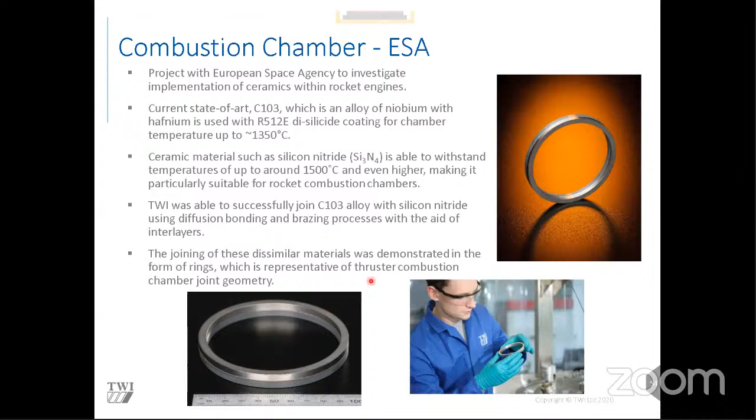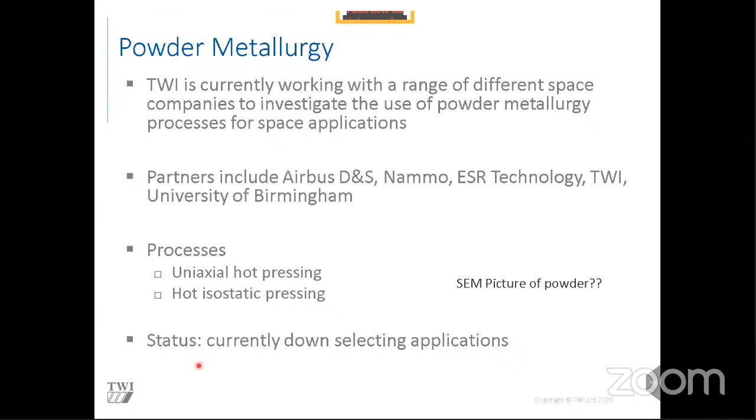So in this project, we were able to join these dissimilar materials. We used ring shapes just to represent the geometry of the thruster chamber, but that was a very good, successful project. Another example of diffusion bonding in industry. So yeah, sort of more generally speaking, TWI is currently working with a range of different space companies to investigate the use of powder metallurgy for space applications. We're looking at uniaxial hot pressing and hot isostatic pressing to assist with this project. So currently down selecting these applications at the moment.

So, right, okay, we're nearly at the end. Let's go for a couple more questions. I'll do the conclusions. Can we join two diffusion bonded products by welding? Yes, you can. There's that image I showed of the... in fact, let me go back to it actually. It's a few slides back. Here you go. So this is a diffusion bonded heat exchanger, and it's been directly welded to on the sides. So yes, you can. You have to be careful though of your heat inputs and what sort of strains and stresses you're putting on the parts. But if you're careful and you design your WPS and your PQRs and all that sort of stuff, yes, you can.

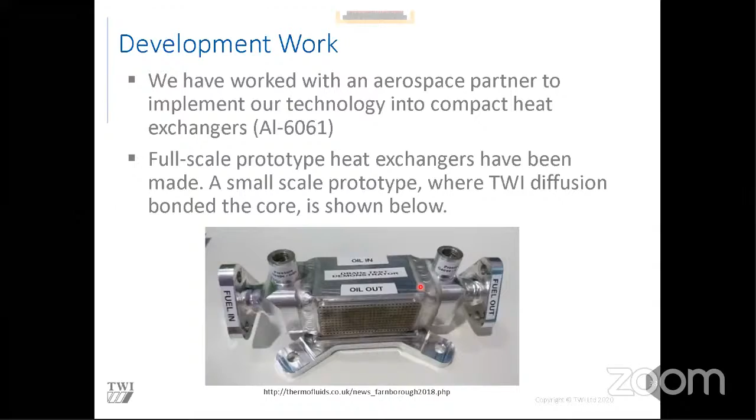I will elaborate on a couple of things quickly. So diffusion bonding as a manufacturing process. The furnace itself, depending on the size you get, is anywhere between probably 350k up to £2 million. So they're very expensive pieces of kit. They're very sophisticated. You have hydraulic rams. You have a vacuum chamber. Some have fast cooling, so they're also a pressure chamber as well. So you have, I think it's up to 10 bar quench. So some of these facilities are very expensive.

And the problem is it's a batch process. It's not a continuous manufacturing process. So I'm talking here about uniaxial diffusion bonding. It's suited to batch production, so lower volume parts, more niche, parts which need higher strength, higher integrity, higher complexity. So it's never going to replace welding. It's never going to replace your basic joining processes. So it is niche, but it has its place in the tools and arsenal of the engineer for creating certain components.